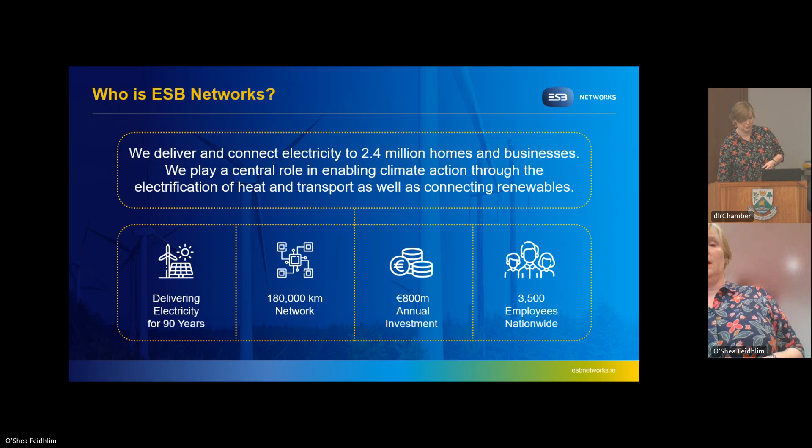I suppose it's probably important to say we serve all customers irrespective of your supplier. One of the things people sometimes think is that ESB Networks is a supplier - we're not, and we serve all customers no matter who the supplier is. There's plenty of suppliers out there, which I'd say Fergus will be talking about later.

Our latest strategy is delivering our networks for net zero. That's all about helping with the climate action plan, all of those climate energy targets that are out there, the new EU regulations, the things we want to do to decarbonise our future for ourselves and for our kids and grandkids into the future. We really feel that within ESB Networks, we're going to be working across industry with everybody we can in order to ensure that, and it means we're going to be helping customers, businesses, everybody, in order to hit those climate action targets.

Okay, so how are we doing that? I suppose the next bit is, where do customers fit in there? At the moment we already have over 1.4 million customers who have a smart meter, and in fact we're expecting to hit 1.5 million meters in the next about 4 weeks.

Of those, we also have about 18,000 customers who have signed up to a pilot scheme called 'Is This a Good Time?' I'll have a little slide on that later, and that's really around encouraging residential customers as well as businesses to be aware of flexibility and shifting their usage of electricity to reduce demand and again reduce the need to bring carbon intensive plant onto the network. We've about just over 40 commercial customers that are all supporting us on that.

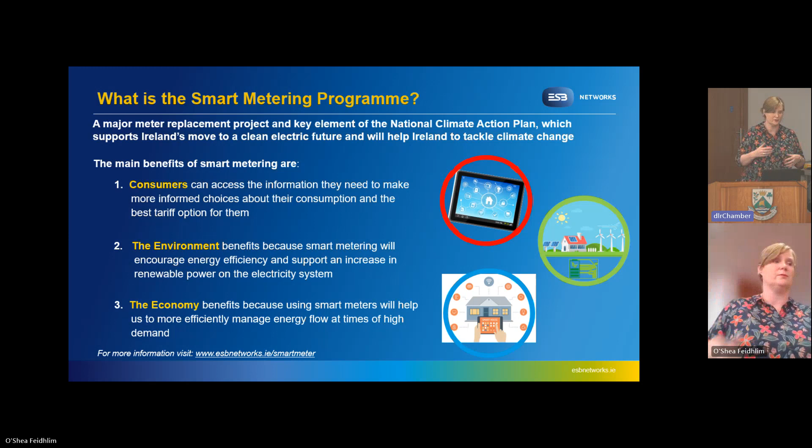This is another one, like why have a smart metering program - just letting you know in a nutshell what I've explained. It's encouraging energy efficiency, facilitating peak load management for that peak between 5 and 7 p.m., supporting renewables and microgeneration, and enhancing competition and improving the customer experience.

You might say, well, how is it enhancing competition? Because customers can have their energy usage to their hand, they can look and see what the tariffs are, but also because we can now pull remote readings off of a meter really quickly.

So that's back to what I was saying earlier, where we now have our poor voltage use case. It means that where we have smart meters, if they detect an over voltage or under voltage, we get an alert back. That alert goes into a system so our low voltage network planners can see where there's poor voltage in areas - like if somebody decides to put maybe 10 electric vehicles in the same cul-de-sac, we'd be able to see very quickly if there was a problem with the voltage.

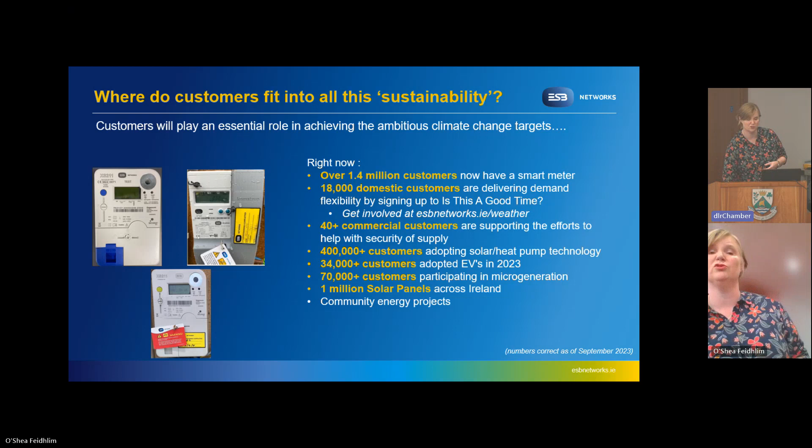That's what's out there. But since the 25th of February, we now have a day-night meter. So if somebody has a day-night meter, we're now doing a like-for-like exchange from your meter at home to the smart meter. And again, that means our day-night customers are also eligible now. So we've about 270 to 300,000 of those meters that we're going to be changing out between now and the end of next year.

And then, for me, one of the big selling points is our ESB Networks customer online account. So if you don't have a smart meter, you can use it to submit your meter readings. But also a lot of people might have their supplier account number and maybe they don't know their MPRN - that's a meter point reference number. So every house, wherever you have a meter, you have that meter point reference number, and you can find that through the online account.

You can also apply and track your new connection. So again, it's giving more information to a customer when they're engaging with ESB Networks. You can view your power outage status. So once you give your MPRN, once you set up that account and link it, you can go in and see whether there's a fault or a planned outage in your area. It works seamlessly with our Power Check app, which a lot of customers are using - if the power goes down, you can go in, check and see whether it's a fault outage or a planned outage.

But it lets you know. For me, it's accessing your electricity consumption data. So you go into the ESB Networks website, create your account and link your MPRN. And once you link your MPRN, just so you know, if you're creating that account and linking your MPRN, you have to have a mobile number with your supplier.

So a few of us discovered that if we hadn't changed supplier in a while, there might have been no mobile number, and you just have to go and update it, and our call center can do that. And once you have the mobile number in, because there's multi-factor authentication, it means you get the text and you can set it up.

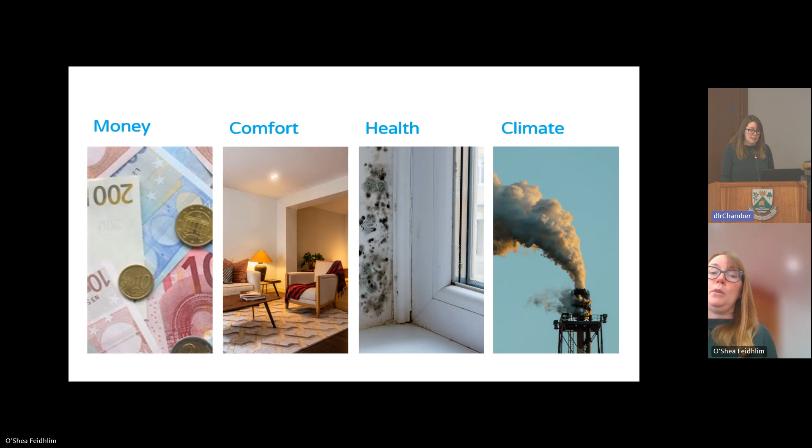So, to a greater or lesser degree, depending on your circumstances, the time of year, and the type of house you live in, these four factors will vary in terms of your priorities. You might find it's easier to save energy during summertime, but it becomes more of an issue coming into winter when you're anticipating higher bills, particularly for heating. But whichever way those four come together, there are ways we can take control of how energy is used.

Now, when we think of saving energy, we often think of the polar ends of it - either turning off lights or getting a deep retrofit to your home. But there's actually a really big swathe of opportunity in between those two. In engineering terms, it's largely called behavior change, which I've never really liked because there's an implication that you weren't behaving yourself beforehand, which of course you were.

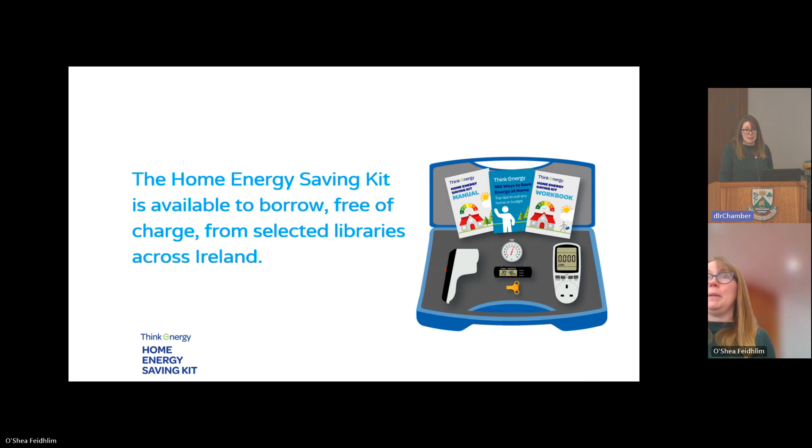So I much prefer to talk about it as energy saving tips, life hacks some people like to call them - just ways of managing what you've already got to make it work a little bit more for you, to make sure that what you're paying for is actually directly benefiting you and not escaping, and that your bills hopefully will come down accordingly.

So the Home Energy Saving Kit will help you check where your energy is going, find out what it's costing you, and then see how you can make savings. It's a collection of tools similar to some of the ones a BER certifier might use, and you can use them yourself and take notes of the bits you're interested in. So if you're living in a house and you suspect there might be drafts, it makes it really easy to find those.

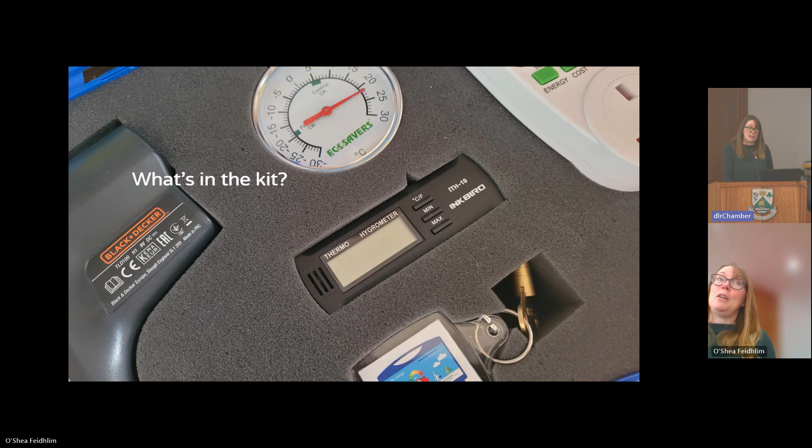It makes it easy to gauge how big the drafts are, where exactly they are, and how to seal them up. If you have a family, maybe a busy household with lots of people using fridges, multiple fridges in some cases, then a simple item like a fridge freezer thermometer can really help get a clear picture of where energy is going.

Inside the kit you'll find a thermal leak detector - usually everyone's favorite. It's essentially a thermometer that shines a colored light at a surface. When it first reads it, it'll shine a green light, and as you move it around looking for drafts, say under a windowsill or around a sink outlet, it'll change color to blue. Then you can see if it's a small or large difference in temperature, giving you a really quick insight into where drafts are coming from without having to climb up on chairs and crawl under things. It's really useful for reaching hard to reach spaces.

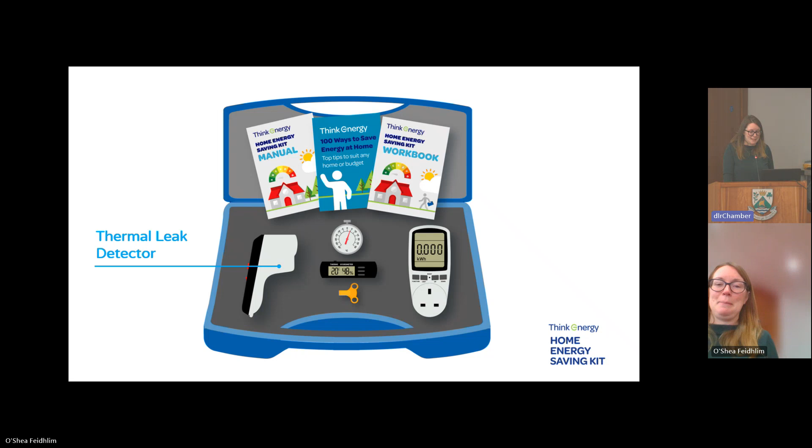Then there's the fridge freezer thermometer. The fridge is really one of the few things you never turn off, so it makes a lot of sense to check that it's working enough to keep your food cool and healthy, but not too much so that it's overcooling and you're overspending.

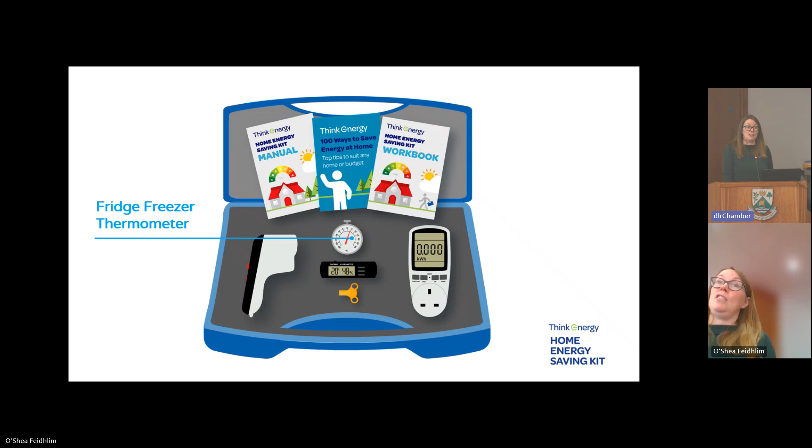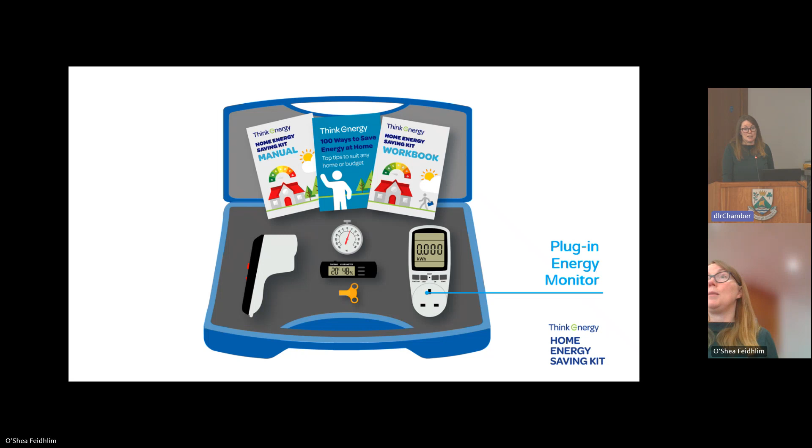The next is the plug-in energy monitor. Anything with a plug in your house, be it your kettle, TV, Wi-Fi system or vacuum cleaner, can be measured directly, and you can see on the screen how much energy is being used. It's really useful for checking things that are on for a long time, like games consoles, TV tuners, set-top boxes - all those kinds of items.

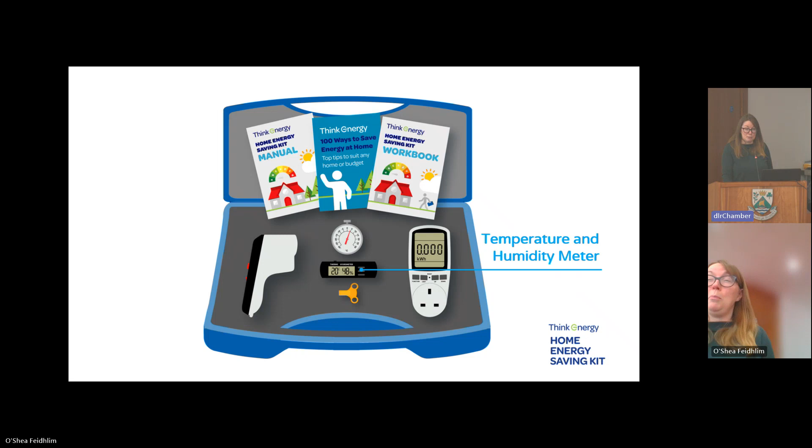Then the temperature and humidity meter. This one is really good because we know ourselves when we think of cold and damp or warm and dry, it's that combination of temperature and humidity that makes a space livable. Seeing where you are in your own home, in different parts of your home as well, can give you a really good insight into what improvements can be made.

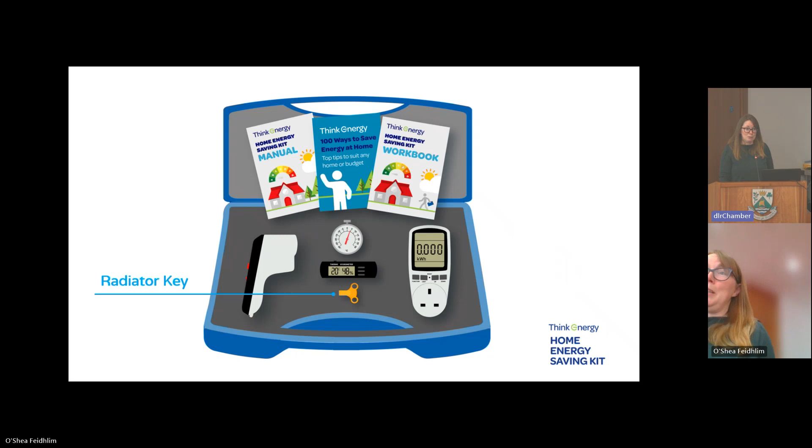And then finally, a very low tech analog piece of kit, but really powerful - a radiator key. I'll talk a little bit more about that in a few moments.

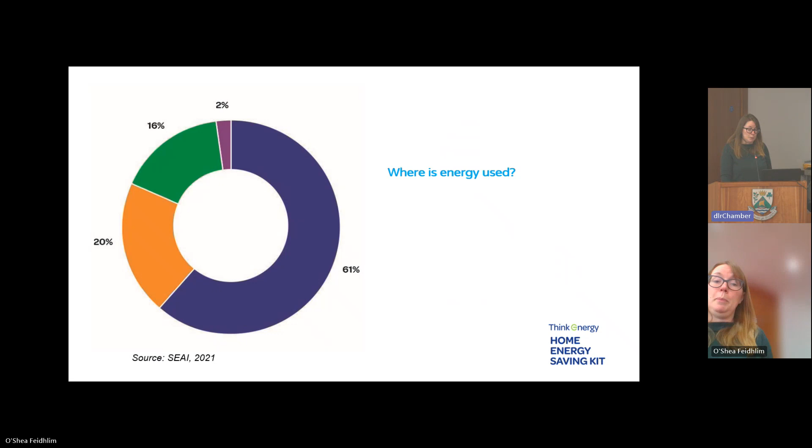So it's good to know where energy is being used in an average Irish home. You might be surprised, or maybe not, to know that almost two-thirds, so over 60%, goes on heating. The next step down would be hot water, and beyond that is lighting and appliances.

That's an interesting one because 20, 30 years ago when we all had incandescents, lighting took up a huge section of the pie, but we've done a huge amount of work on getting used to energy saving light bulbs, for example, and that's reflected in today's usage.

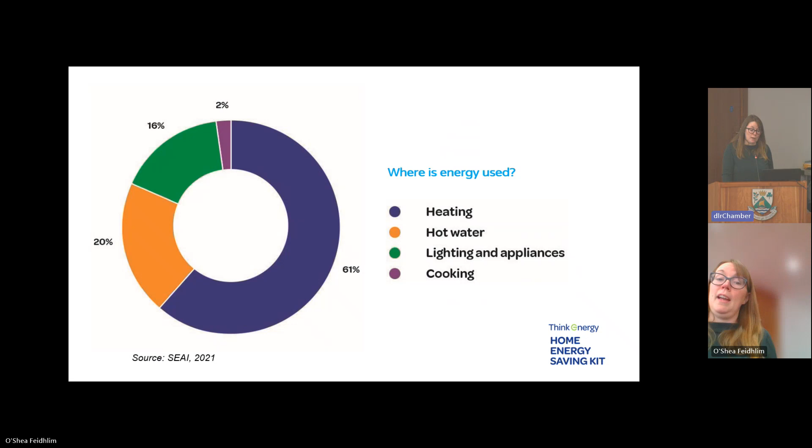And then finally, 2% is cooking. If you look at that pie chart, I find that really interesting because we've all got limited time and resources. If you were to put an hour or two, or a certain budget or no budget at all, into trying to improve the energy performance in your house, then it really makes sense to focus on the big ones. It's an awful lot more worthwhile sealing in your heat, making sure your heating is set correctly, than it would be to overhaul entirely the way that you cook your food. It's still worthwhile, but the opportunities to drive down your usage and your cost and make your home more livable is a lot more heavily tipped towards heating and hot water.

So I'll spend a little bit of time looking at those. Initially, the obvious thing is to look at what temperature your heating is set to. As temperatures change naturally throughout the year, we may need to go and have a look at that thermostat and see where it's set. Our recommendation for rooms that are occupied, your kitchen, your living room, during the day especially, is 18 to 20 degrees is plenty. In other spaces that maybe you move through or you're only in for short periods of time, your corridors, your hallway, hall stairs landing, and bedrooms even, 15 to 18 degrees is just fine.

Now, the radiator key works by letting air out of your rads. I will start by saying you have to do this when the heating is off. It's a really, really important safety measure. Often we kind of think the air's not going to come out unless the pump is on, but actually it'll come out just due to the water pressure itself. So once your whole heating system is fully cooled down and there's no hot water left in the rads, then that's the time to let air out.

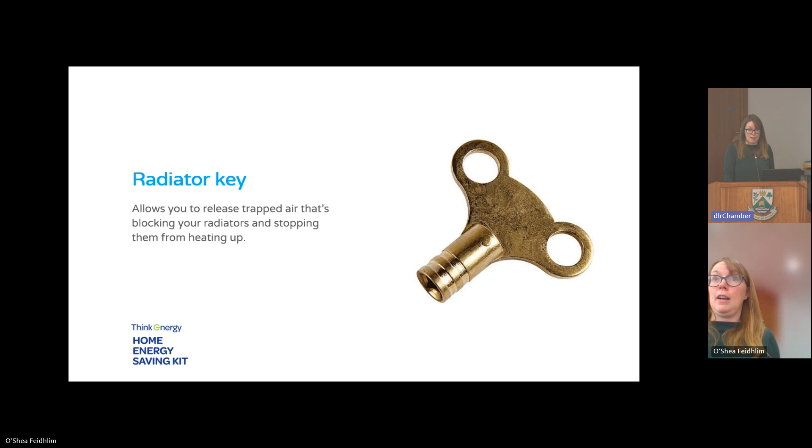The reason it works really is radiators are one of those funny things that are kind of misnamed. Although they do radiate heat, their main job is convection. What they do is transfer their heat to the air and the air circulates around the room. Because that's the way they work, they suck in cool air at the bottom, that air passes over hot metal fins at the back of the rad, and then that warm air comes up out of the top and circulates around the room.

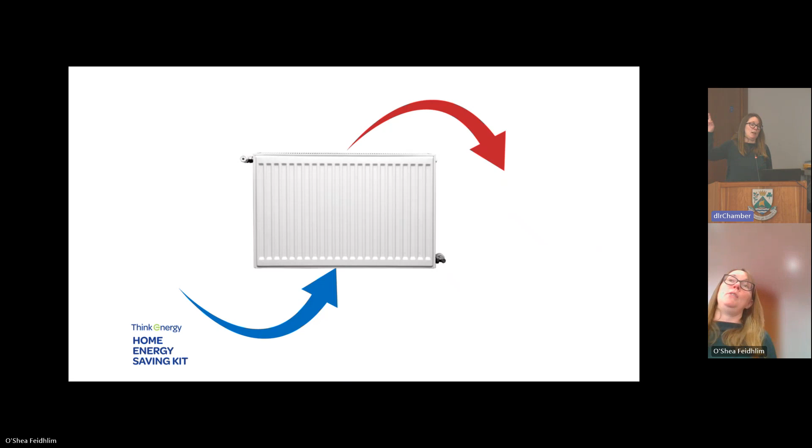So that's why certain habits we might have, like decorating with long curtains, matter. You can see straight away that in the evening time when that curtain is drawn, most of the air circulation is going to be trapped behind it. So things like just checking the window coverings you have can be really helpful. Also, and I know this is painful for some people who've maybe invested in radiator covers, if you keep them on in the summertime when you're not using your rads, and then in wintertime, if you can bear with maybe taking them down for a few months, or failing that, maybe taking the top off, you will get an awful lot more of your money's worth out of each and every single rad in your house.

And then good old-fashioned Irish mammy advice, I do this one myself at home: please close the doors. Because as air circulates around, if it circulates around in one room, then it stays in that room and it doesn't get lost wandering around the house. That's a really simple but very effective habit.

The thermal leak detector, as I said, is really good for finding where drafts are coming in. These are available in similar kits all around the world, and often they'll use them in summer and winter to find hot air coming in. Luckily for us, that's not a big problem, we don't spend a huge amount of money cooling our homes. But the principle stays the same, you're looking for changes in temperature. In Ireland particularly, you're talking about cold air coming in under windowsills, around window frames, around your external doors, but also funny little places you mightn't expect that are hard to get to, so under your kitchen cabinets can be one.

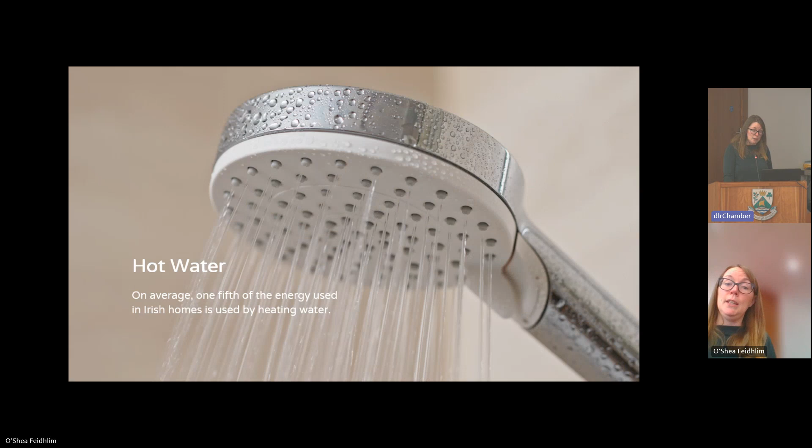Next area to look at would be hot water. I won't mention the unpleasantness of the last few years, but we all got very good at washing our hands. One way to save water and energy is to make sure the hot water isn't running while you're soaping up your hands. If you think of how many times you and everyone in your household washes their hands over a year, that's a lot of hot water going down the drain that could be saved. And if it's hot, you've paid for it to be heated within your heating system, often with your central heating as well. So keeping an eye on how that is used is really worthwhile.

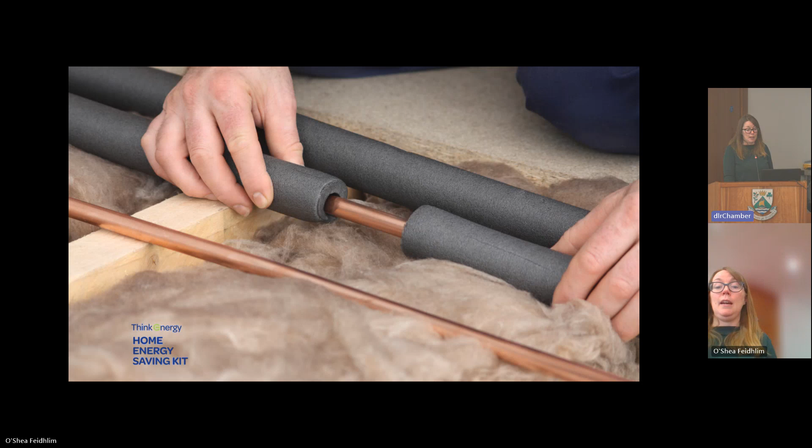Sealing in the heat once it's been generated - a lot of immersion tanks will have lagging jackets. Doubling up on those is sometimes a great idea, but you can also use the thermal leak detector to find any hot pipes, because the further the water has to travel uninsulated between the tank and the outlet - your shower or hot taps - the more chance it has to lose heat, and you're losing out on what you've already paid for.

The temperature and humidity meter - this is my favorite actually. It's a really easy way of showing something I wasn't aware of a few years ago: the role of humidity in terms of not just comfort and health, because damp is never a good feeling, but also in terms of energy use. If your home is set up comfortably, you'll most likely be living somewhere between 40 and 60% relative humidity. Below 40%, you get that first-day-of-holidays feeling - you might wake up with a dry mouth and your skin feels a bit crackly and uncomfortable. Above 60%, you start to feel that stickiness, be it cold or warm. And above 60 is when conditions exist for mold and condensation to start happening. If you have any respiratory concerns - I have asthma myself - I keep a close eye on this to make sure condensation isn't an issue.

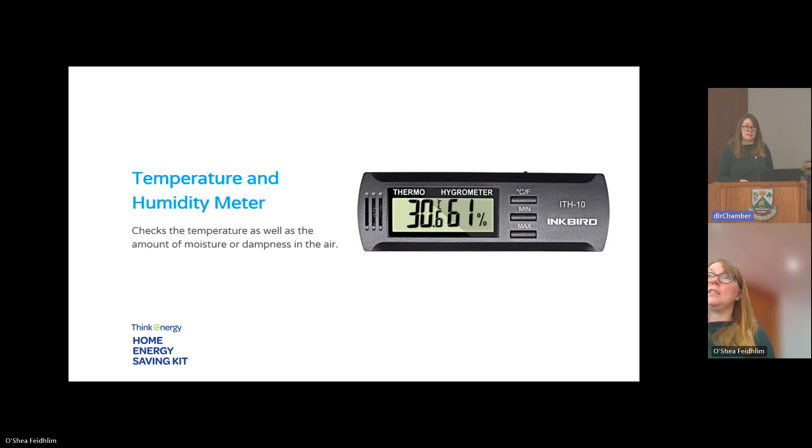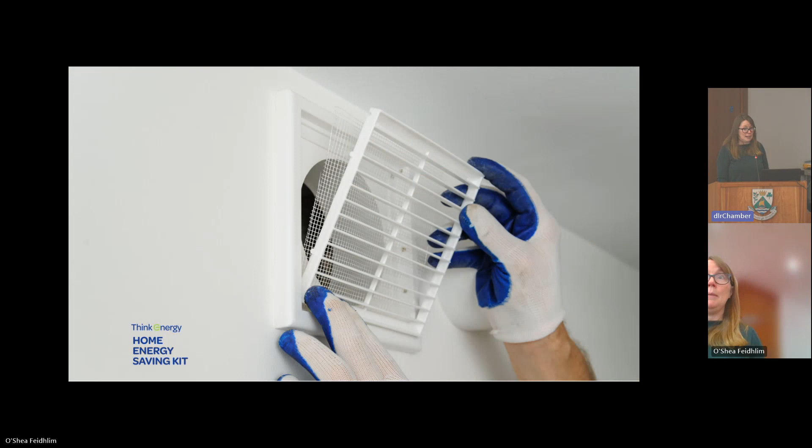I check all my vents to make sure they haven't been blocked in any way, make sure those are working properly. And if you want to invest, a dehumidifier is a really good one. It'll keep an eye on the moisture levels in the air, but also can do really good jobs for you, like drying your laundry faster if you're drying it indoors, and just keep your home dry and healthy.

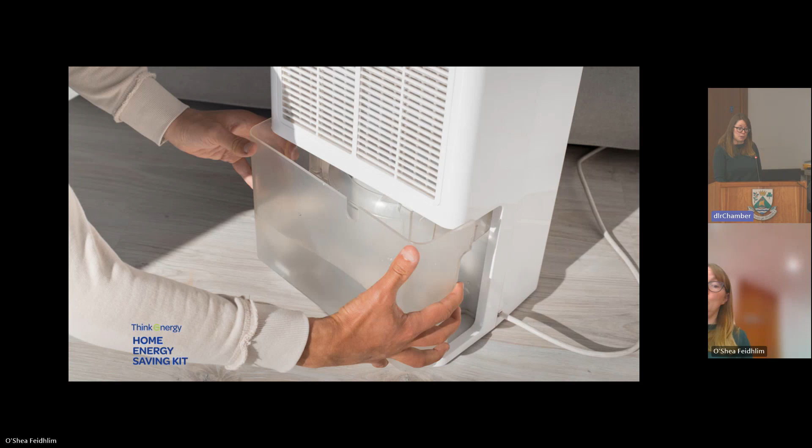A plug-in energy monitor is also really handy to use, and I wouldn't suggest going through every device in your house, but if you were to check any, I'd go for ones that heat up either on purpose, like a kettle or a sandwich toaster, or as part of what they're doing, like a washing machine or a tumble dryer. Those are all worth checking.

And also ones that heat up and it's got nothing to do with what they're supposed to be at - things that aren't sold on the basis of being energy efficient. Often you get given them for free, for example, so Wi-Fi modems and TV tuners - they heat up an awful lot, which is an indication that they are not running efficiently and are costing you electricity that you're not getting the benefit of.

Standby mode - we've probably all heard of this. I tend to associate it with things like TVs, but TVs have gotten an awful lot more efficient, whereas things like games consoles, again, we don't buy them on the basis of efficiency. We buy them on the basis of processing power - we want them to be gobbling electricity. So on standby mode alone, some of these have been shown to use as much as 60 times the amount of electricity that a television would on standby.

Fridge freezer thermometer - again, like I was saying earlier, you never get to turn this off, so it makes sense to check that it's not overcooling or not cooling enough. And that's something that can change over the course of the year. So now that our temperatures have dipped, maybe our summer setting for the fridge isn't needed anymore. You might get to check and turn that down a little bit and save some energy.

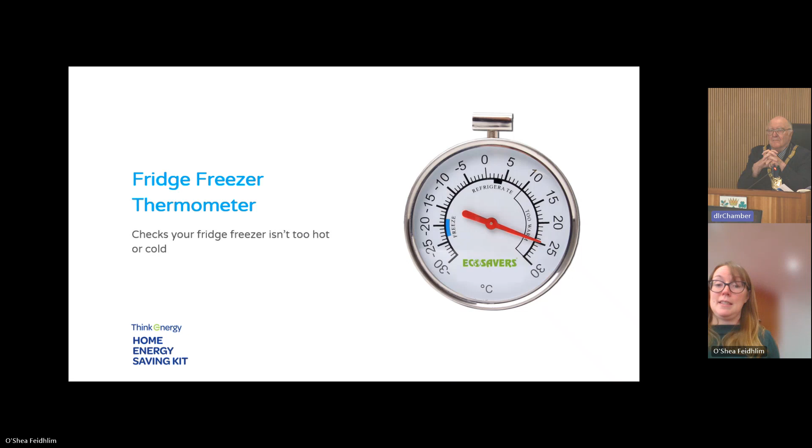And then just in terms of the way that we use our fridge, we like to recommend the peek and grab - rather than standing with the fridge door open for a long time, which lets out all that cool air that's done the job for you, arrange it so that there's a lot of circulation around the food. Also just know what you're going into the fridge for in advance, and keep that open door time to a minimum.

From an environmental point of view, sometimes we can think, what difference would it make, I'm only one household. But our home usage makes up such a significant proportion of our greenhouse gases that if every household in the country were to cut it by 10% - and that's doable, doing just the things I've described already - that'd be the equivalent of taking 385,000 cars off the road in terms of greenhouse gas reduction.

So if I can leave you with any message at all, it's whether you own, rent or share, no matter what your circumstances or budget is, you can make a difference to your bills and to your environmental impact with these tips. And what I have at the end is, if anyone's interested, I have guides to 100 ways that you can save energy at home.

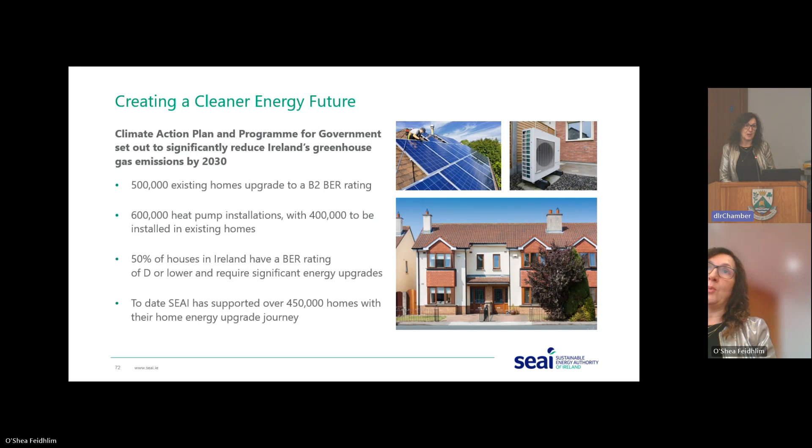I'll talk a little bit about that. So like I said, a quarter of all energy consumption is in homes, and probably 80% of that energy use in your home is either to heat your house or to heat your water. So when you're thinking about tackling things, those are the things you should think about.

So thinking about tackling how you heat your home, where do you lose heat? You lose heat through your roof and your walls primarily - those are the two you should look at. Then look at draft stripping your doors, your windows, all of that. That's another big area where you can lose lots of energy and heat.

After that, it's doors and windows. People often think, oh, if I change my windows and put in a new door, I've saved energy - you haven't really. The big areas where you lose energy are your walls and your roof, they're the ones to tackle. Your windows are more about how your house looks than actually losing heat, especially if they're already double glazed, the older double glazed. If they're single glazed and half fallen out, then you're losing lots more through air infiltration as well.

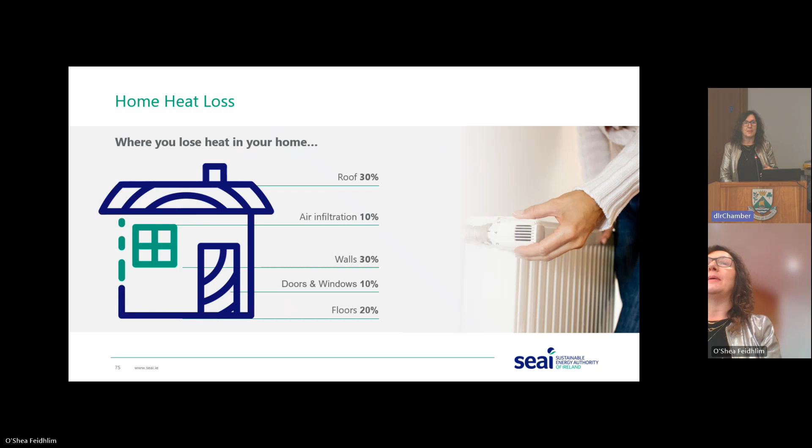The final one then is floors, but only if it's suitable. Many of us, it's not suitable - you'd have to take up suspended floors, it would cost a lot of money, and it would be very disruptive. In that case, you're thinking about carpets, rugs, maybe filling in cracks in floors, stuff like that. Why would we do it?

Government has talked about this very much. Most people, this is us telling you what you tell us - most people do it for comfort and cost savings, those are the main reasons. After that, the environment is a really important one for people. And the final one is actually improving the value of your property. We all know if you upgrade the energy rating of your home, there is an increase to the value of your property should you ever decide to sell it, or indeed for something that's rented.

So the 3 steps to thinking about upgrading your home are assess, insulate, and then renewables. And what we mean by assess is figure out what you need to do. How do you get started? I would suggest talking to other people first - talk to people who've got it done already, and talk to local contractors if you know some.

Then when you want a little bit more information, go and get what we call a BER assessment - that's an energy rating of your home. While it gives you the energy rating, there is an advisory report that comes with it, and that will tell you the best things to do in your home and in what order, and generally give you a broad outline of whether they're cheaper or more expensive to do.

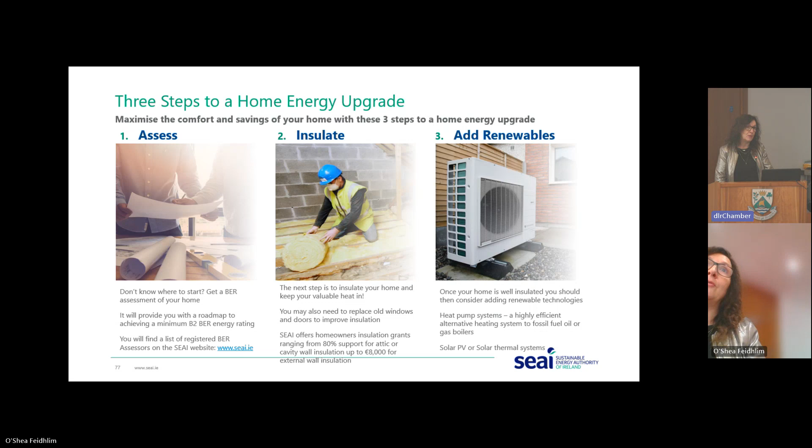But after you've made your house warm and comfortable, think about your renewables. Think about maybe changing your heating system to a heat pump, putting solar panels on your roof, or getting an electric vehicle.

So if we compare the home energy upgrades available through SEAI, on the left-hand side I'm talking about the free upgrades. This is for people on certain social welfare allowances. In that case, SEAI will arrange an assessor - you ring them or go through your local social welfare office and get on a list with SEAI. We arrange to come out and visit you, get somebody to do an assessment of your home, decide what needs to be done, let you know what those things are, and then work with you to send out contractors to do the upgrade.

The middle one is what we call a one-stop shop service. This is for homeowners who aren't getting the free energy upgrade and are looking at their home wanting to do a big renovation - maybe an extension, or upgrading and changing things around. At that point, it's a good idea to think about energy efficiency, and that's when you might do those deeper upgrades. If you're going to spend quite a lot of money, we'd suggest thinking about going with a professional who will project manage that for you.

Smaller jobs you can often do yourself and project manage, just having a contractor on site that you talk to. But for a big upgrade costing maybe 50,000, where SEAI might give you grants of 20,000 but you're still spending 30,000 of your own money - like any big job on your home, it's worth having a professional involved. Those one-stop shop services will deal with the contractors, make sure there's quality, make sure it all happens in the right order and the right way. They'll deal with SEAI and get the grants for you, only charging you the cost net of grant, so you only pay the net cost at any time.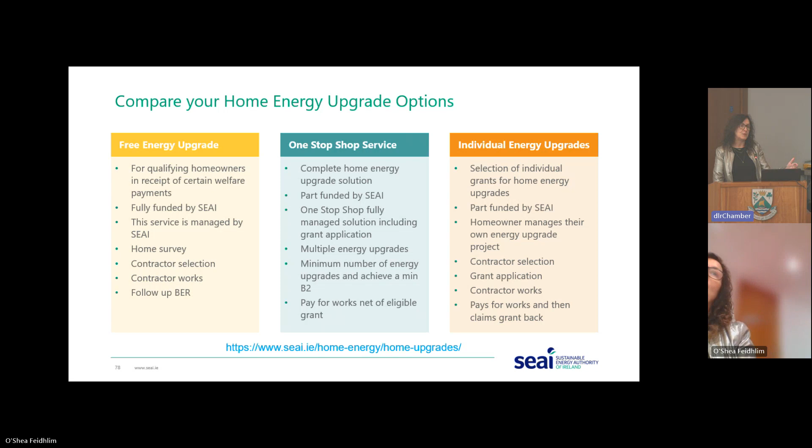You make the grant application. The contractor comes, does the upgrade for you, fills out the forms that SEAI will have sent you to ensure you can claim your grant. When the work is done, you get a BER contractor to confirm the work was completed and what your rating is now. You send all of that into SEAI and the money will generally be in your account within a number of weeks. Sometimes there are inspections, which means they'll come and inspect and only pay you after the inspection, but for 90% of people there are no inspections and you just move along and get paid.

So the full energy upgrade, just to delve into that a little bit more so you're aware of it, that's for people on certain social welfare allowances. The big traditional one was people on fuel allowance, your winter fuel allowance that you get paid. But the government has widened the definition of who's eligible now.

So there's lots of newer ones that people should look at and think about. You've got one parent family, family income supplement, care allowance, job seekers allowance where you have younger children and you're on it for more than 6 months. And then the newer ones are carers allowance, where you're living with a person and caring for them, or disability allowance for more than 6 months with younger children.

So all of those allow you to apply to SEAI to have your home assessed and upgraded. Now, what I'd say, and I'm sure one or two people here know this, because government has widened that eligibility, we have a huge amount of interest. So we have quite a long waiting list.

We are getting through people. We have new contractors on our lists, and we're trying to get through people quickly. But people can be waiting up to 2 years from when they contact us to have the job completed. We do try to prioritize people with colder, worse insulated houses, and we also try to prioritize people who are more vulnerable. The priority is for homes with a BER energy rating of D or less.

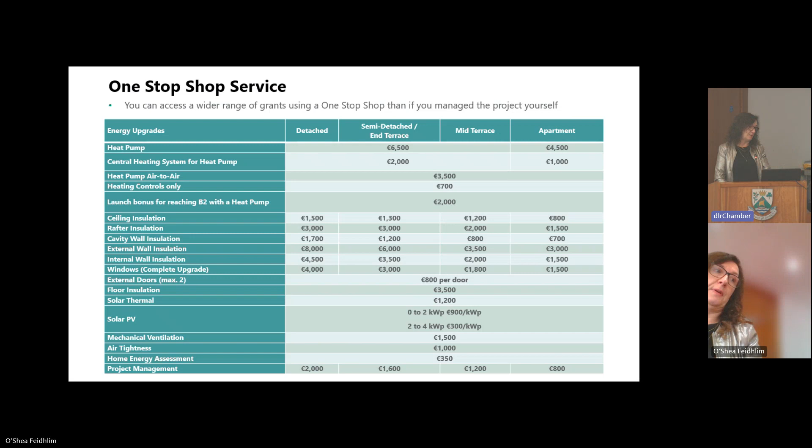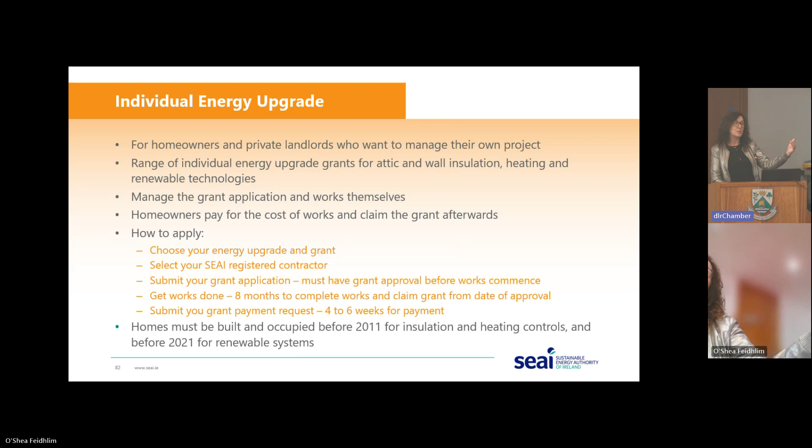On the individual energy upgrades, this is generally where you've done that yourself and decided to project manage it. Sometimes some of those one-stop shops will be interested in doing the smaller upgrades and will help you out. But there's no doubt there's a cost to that - people don't do that for nothing. There's a project management cost involved, and that's why in our grants there is a project management grant to help you pay those one-stop shops to project manage your upgrade. Those are the grants for the individual upgrades.

You can see there's not as many grants there. For instance, there is no grant for windows and doors on the individual upgrade. Why is that? Well, as I said, that doesn't generally save as much energy or CO2 for people. It's great and looks lovely in your house, but mainly it's aesthetic rather than energy efficiency. And if we had individual grants for it, I can tell you with certainty, every penny we had would go out on windows and doors rather than attics and walls and all the things it should go towards.

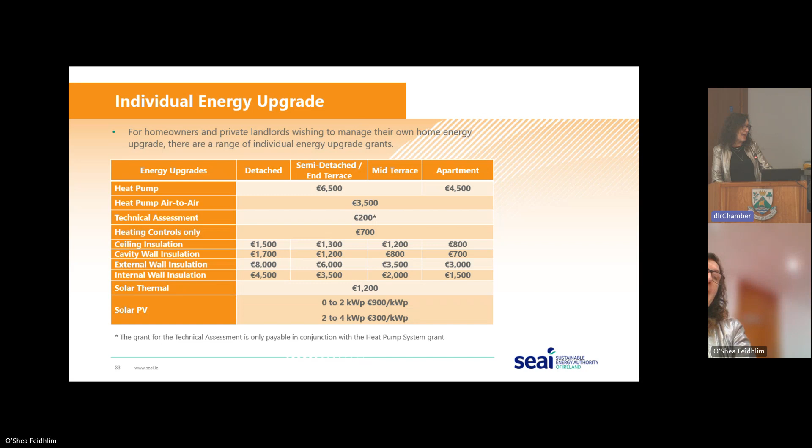Just in case there's anyone in the room, for those small landlords, there are some tax allowances if you upgrade the property. Why is that? Because we don't want tenants to be cold in their house. We are trying to encourage landlords to upgrade the homes they've rented out so that tenants are warm, comfortable, and have lower bills in their home.

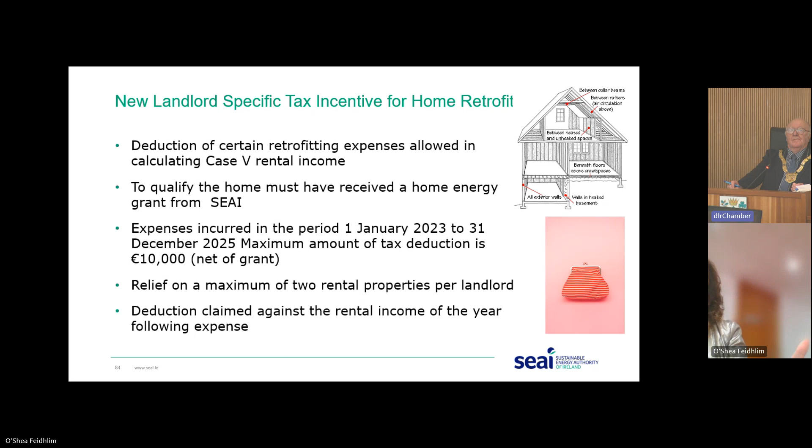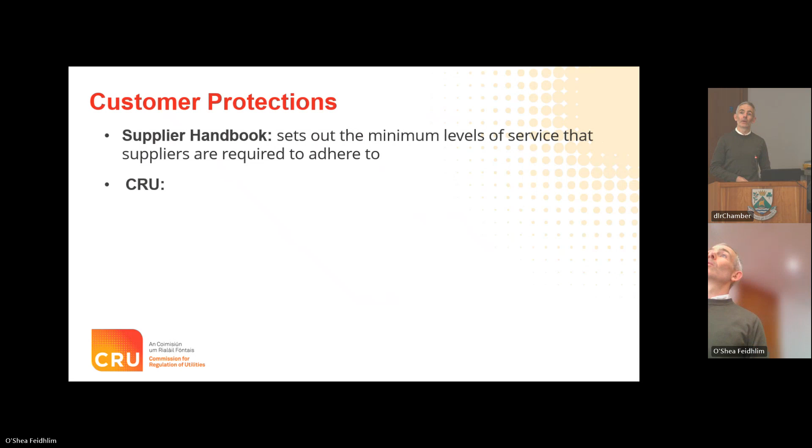We also have a role in providing information to customers about their rights and about engagement with the energy system. Our website has a lot of information on there, much more than I'm going to talk about today. So I encourage anyone to have a look at that if you ever want to find anything about dealing with your electricity or gas supplier.

We also offer a free independent complaint resolution service. So if you have a complaint with your energy supplier or network operator and you're not happy with the outcome of that, you can bring it to us. We'll investigate and adjudicate on that and award compensation where appropriate.

Just to mention, we did introduce additional customer protection measures last winter, just as a result of the energy crisis. And if you want to find out more about your consumer rights, any information and details, it's all up there on our website.

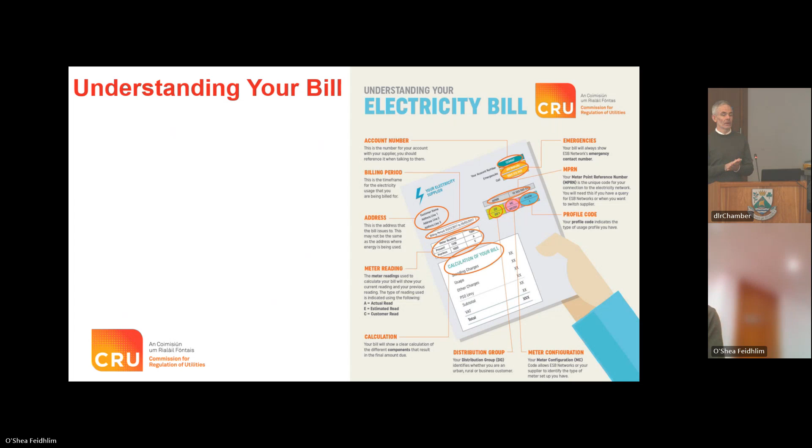So, understanding your energy bill. Research conducted by the department last year, and this year, shows that energy bills are now the #1 concern for households in the country. The key way to understand a bit about how you consume, how much you're paying, is your energy bill. I'm sure everybody here is engaged enough to be looking at it, but our research shows that less than half of customers actually open their bill and look in any detail at what's on there.

But we've put requirements in place for suppliers to have key information about your energy use, so they all have to put that on there. The image there is just taken from our website, and it goes through the details of everything you need that's on your bill. So they are worth looking at and getting familiar with, just so you can better understand your consumption and how much you're paying and what's contributing to those payments.

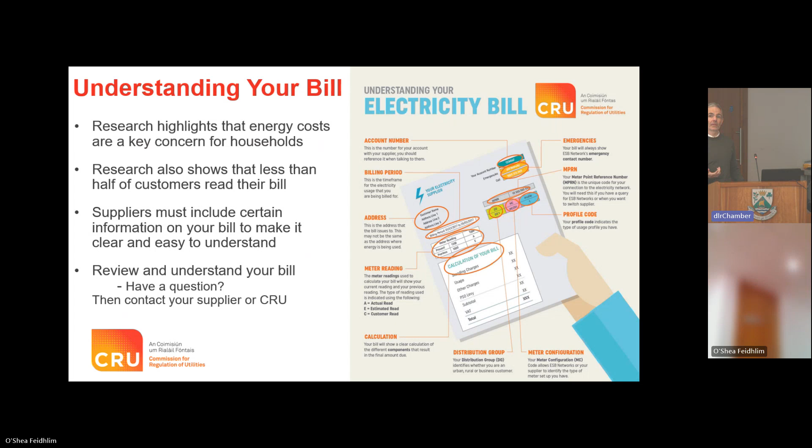But if you have a look, and if there's something you don't know, or you have a question about, then contact your supplier, ask them. That's what they're there for. Or if you prefer, you can contact us, and we'd always be happy to help. I have contact details for our customer care team on the last slide.

So one of the key developments in the energy sector, as Carmel talked about, is the rollout of smart meters. Most people here, there's almost 1.5 million installed now, so most people here will have one installed already. What I would mention is nothing changes when you get your smart meter installed, so your contract with your supplier doesn't change, your tariffs don't change. You have to activate it, and you can do that by talking to your supplier.

But what the smart meter is, it's a tool and enables customers to do a number of things. Carmel talked about all the access to better consumption data that you can get. You can also avail of smart services with your supplier.

These things can help lower your carbon footprint. I won't go over how smart meters enable you to do that, since Carmel talked a lot about it. But they also introduce time of use tariffs, and if used in the right way, they can save you money and also help reduce your carbon footprint.

So what are time of use tariffs? I think the first thing to do is understand what's out there and what smart meters do. Traditionally, we've had two real types of tariffs in the market: your flat rate or 24-hour tariff, which is what most people are on. You just pay the same rate no matter what time of day you use.

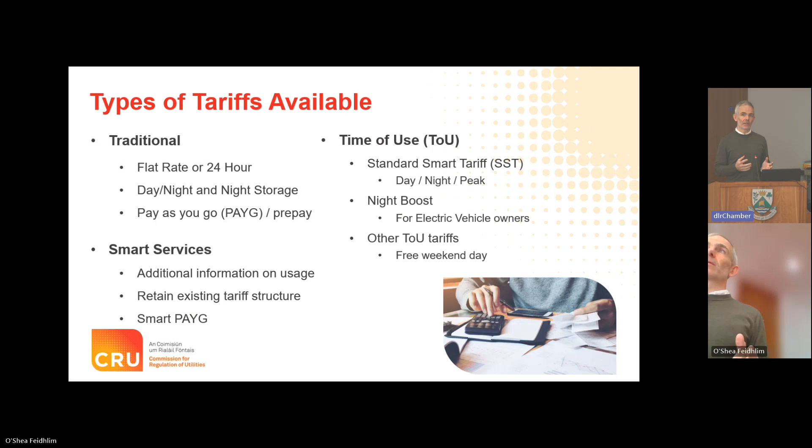That's something I do now. I've switched to a smart service option where my supplier can get my data, but I'm still on a flat rate tariff, and I can access that data online. They can show me when I use electricity, and give me insights on whether I'm using it on heating or appliances or whatever it is. So it allows me to be better informed.

And then if I want to make the jump to time of use, I can do that from a more knowledgeable position. I'd just mention that in the future, for any pay-as-you-go customers, that will be a feature of smart meters in about 12 or 18 months.

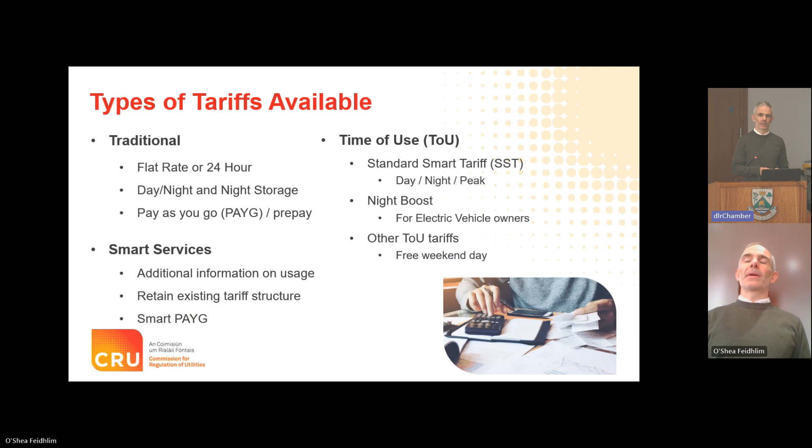So, comparing tariffs and switching.

Switching is a great way to save money. It's easy to do. There's pressure to switch your insurance and other utilities like broadband, and sometimes that can be complicated and take a lot of time, but switching energy is really easy to do, and it can save you a lot of money.

We produced research last year that showed if customers had switched in each of the previous 4 years, they would have saved up to €1,600 over that time for electricity alone, and up to another 1,200 for gas. There really are significant savings to be made, but lots of people don't switch, and that means they end up on the higher rates with their supplier.

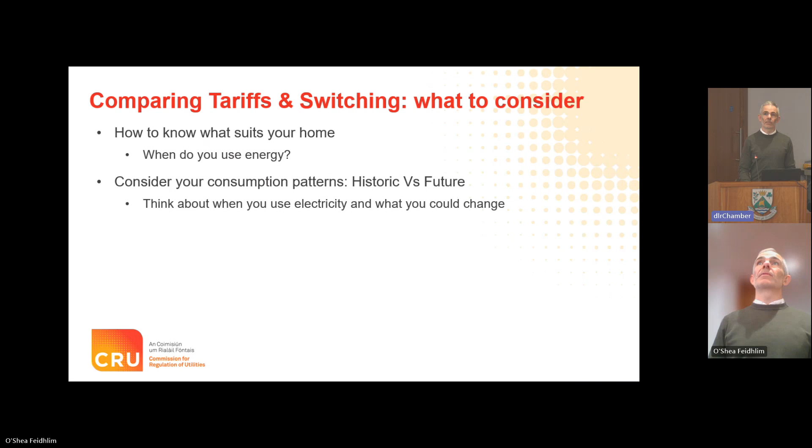If you're thinking about switching and about a time of use tariff, consider how you use your energy at home, and can you move some of that to another time. If we're all on a flat rate tariff, maybe we put on the washing machine and dishwasher at peak times, but we don't need to. If we could move some of that to a different time, we might avail of some of the savings that are there. We need to consider how we consume now, but also think about what you might be able to shift to avail of different tariffs.

Obviously, things you need to consider are whether you're going to get solar panels or electric vehicles, and that might influence your decision on the unit rate and standing charges you pay. Particularly if you're a low use customer, keep an eye on the standing charge, because it's important, and especially if you don't use a huge amount, that can be a bigger portion of the bill. Different suppliers can have a significant difference in the rates they charge.

There are prepay solutions available out there, and that might be something that works for you. But if you're considering that, I definitely advise you to look at the standing charges element, because it can be much higher for those prepay options.

You can get a lot of that information from your ESB Networks online account that Carmel has talked about. The CRU also produces monthly reports on what the best tariffs out there are, and that can be a resource online on our website.

If you are going to switch, you can gather the information you need from your bill: your meter point reference number, or MPRN, which you need to switch. You can look at the tariff you're on and get an idea of how much you use. You also need to be conscious of whether you're still in contract, because if you leave your electricity supplier while still in contract, you can incur an early termination fee. So just check that, and if you're not sure, you can always give your supplier a call.